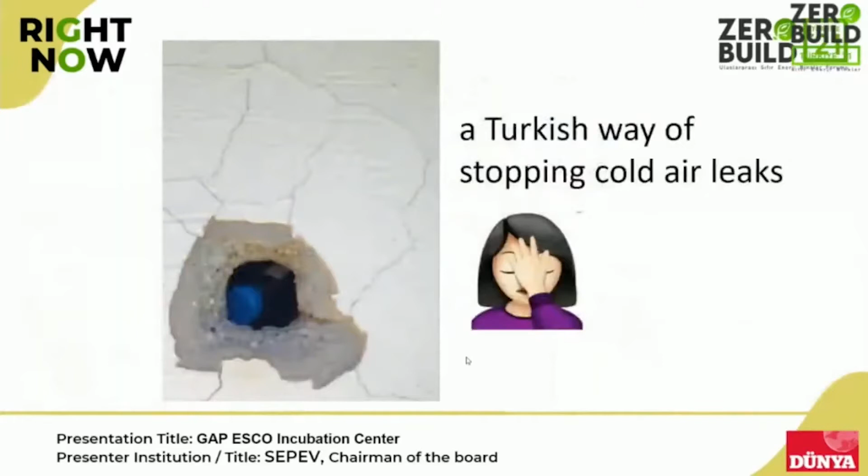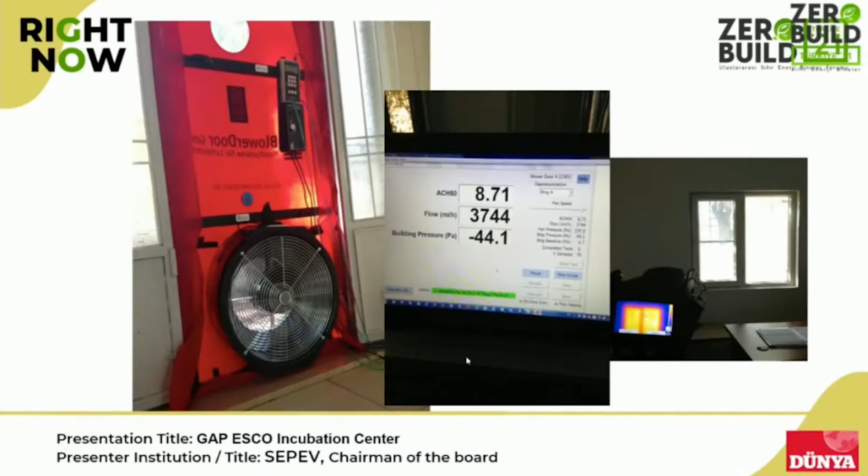We conducted an analysis. It has three main parts, and we worked on the air tightness of all these parts. Following the analysis, we realized that the condition was poor, it was not enough, and we completed a new design in line with the passive house standards.

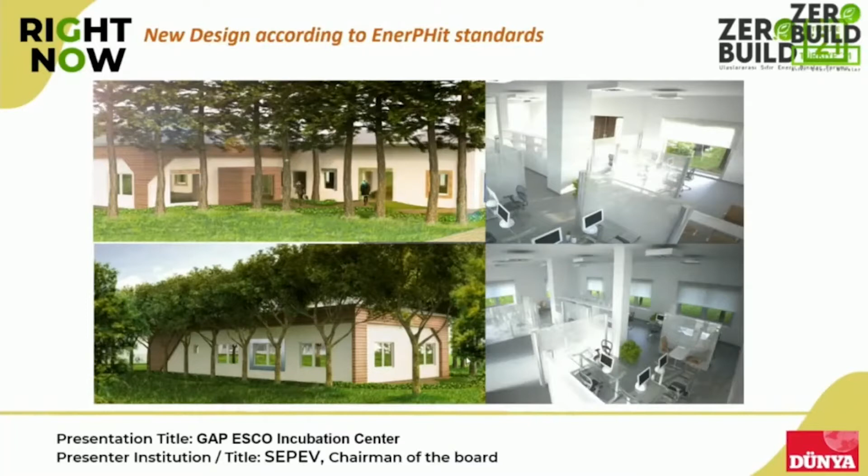We completed the projects and presented them in 3D version. Since it is located in a place with hot weather conditions in summer, first we worked on thermal and acoustic insulation, air tightness, and the best windows and doors. I will show all these stages one by one in the course of my presentation.

We used this window framework and also window frames and door frames for insulation purposes. In order to reduce the workload for cooling, we carried out some controls, also for natural ventilation, and we decided to design windows that can be opened, especially at night times.

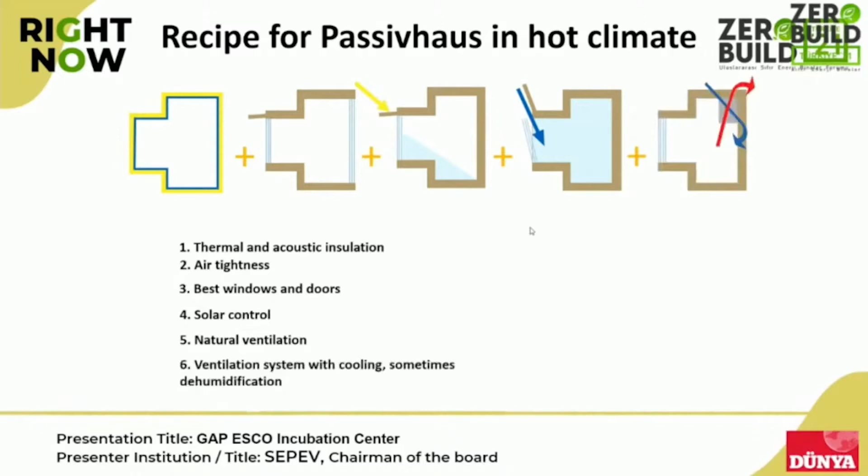We also had heat recovery, and natural ventilation was important for us, along with ventilation with cooling and sometimes dehumidification. You see the plan, it has 300 square meters, and it is an open office design.

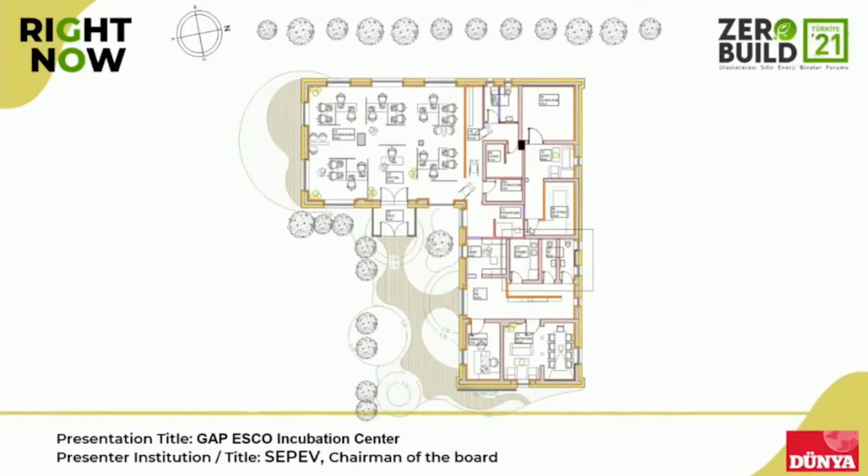So for us, building these types of passive houses is important in the details, and it is really good for us. We can design it in a good way, but we need to raise awareness of all these issues.

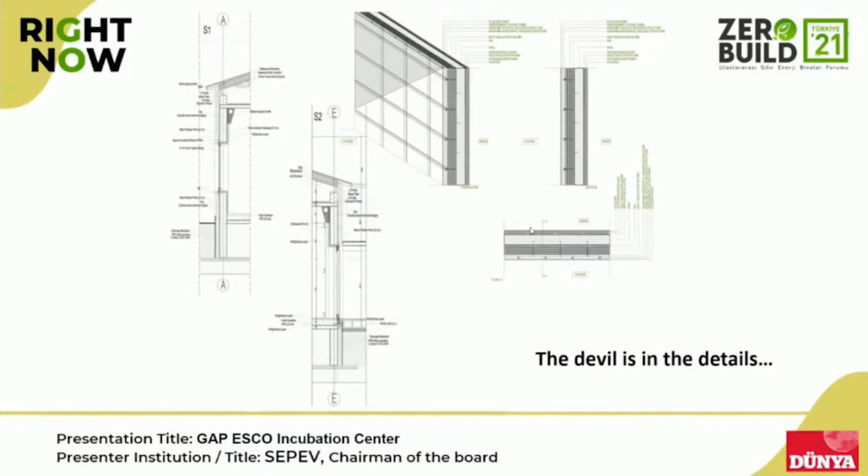If you were not with us in the morning session while I was talking about this issue, we at SEPEV work with designers and artisans, and we also serve as a training center.

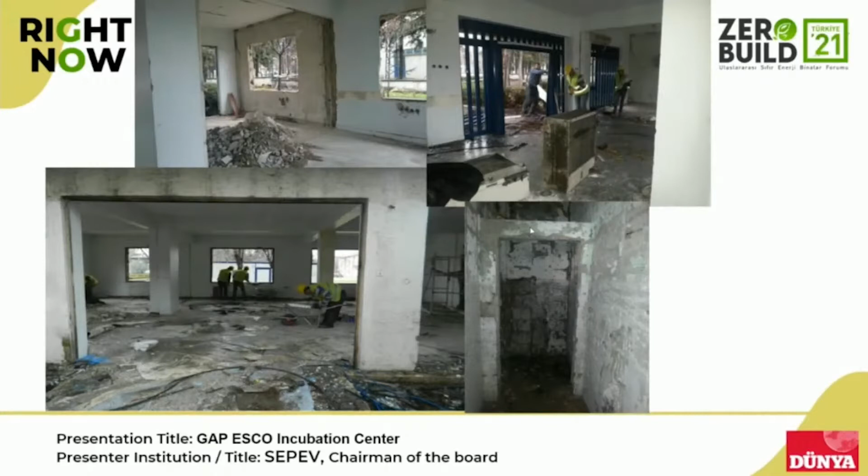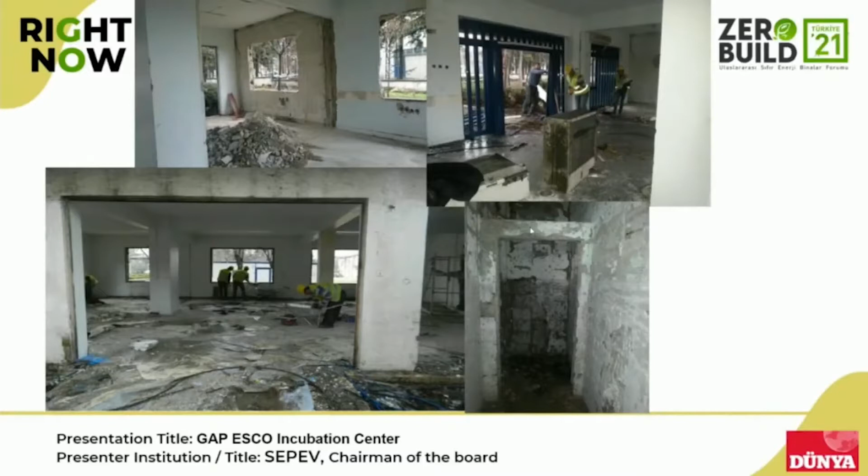First of all, the building was poor in terms of its windows and doors, so we removed them and began working on the interior part because of the moisture. There were some walls that needed to be removed, and we changed the roof completely.

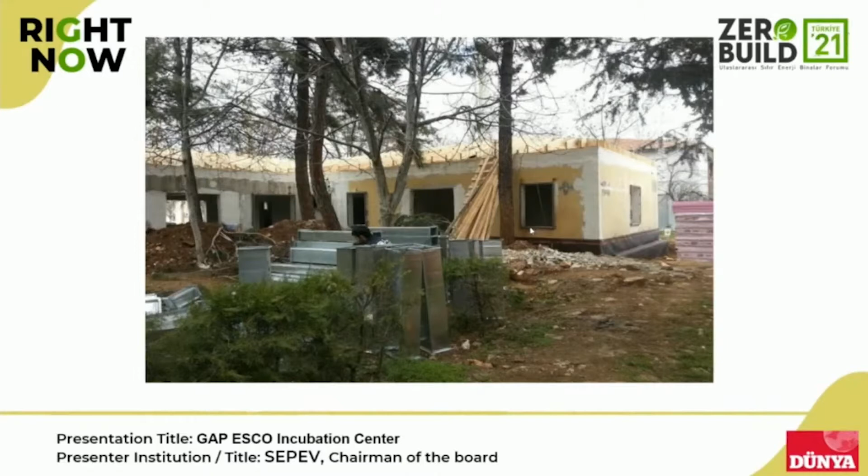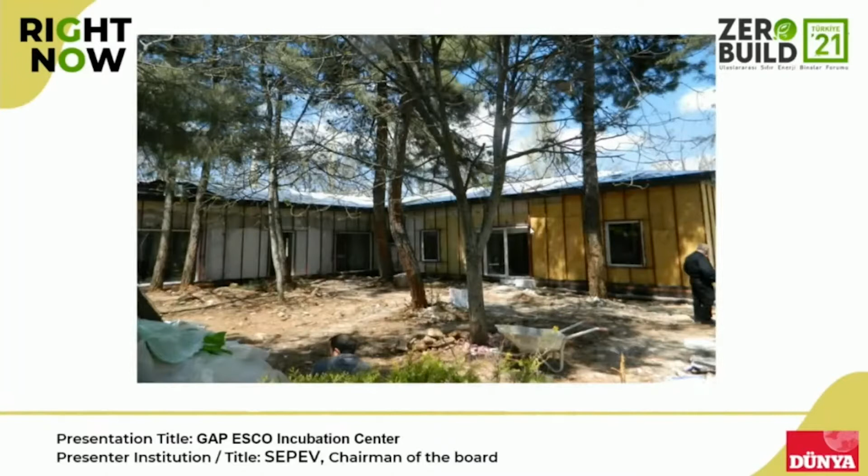It was highly problematic since it was a renovation project. That means we didn't have any chance to work on the basement, but we did our best to enhance the water insulation and drainage system. Although we were not able to reach the basement, we did our best to support the insulation, using material with 15 centimeter thickness.

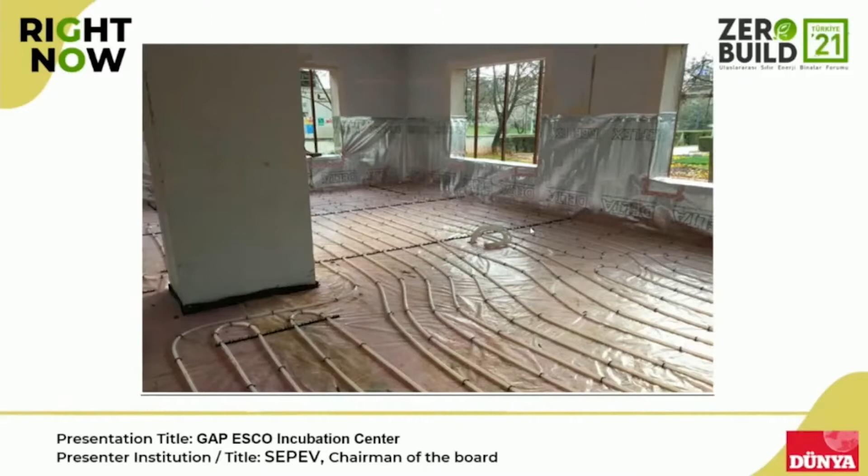You can see the outer wall, exterior wall, and the insulation materials here. The material is important for humidity, serving as a barrier to humidity. It is stone wool and glass wool, which are very important for us.

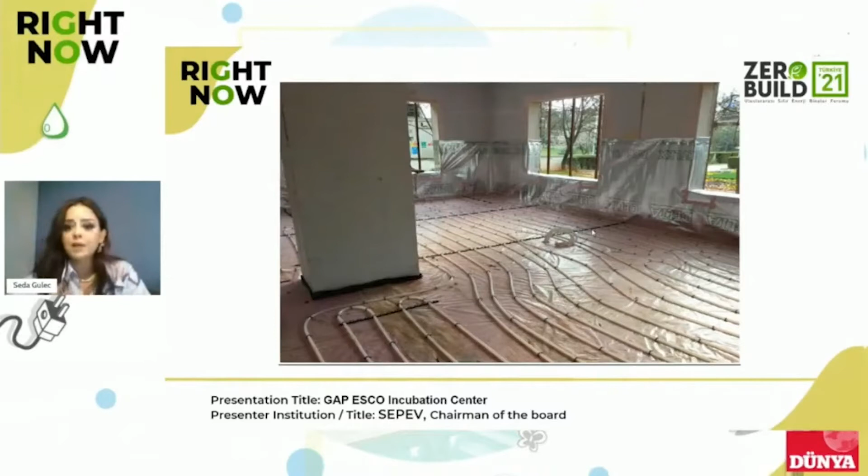It is important for air tightness, and these membranes are important for us. And we have this stone wool.

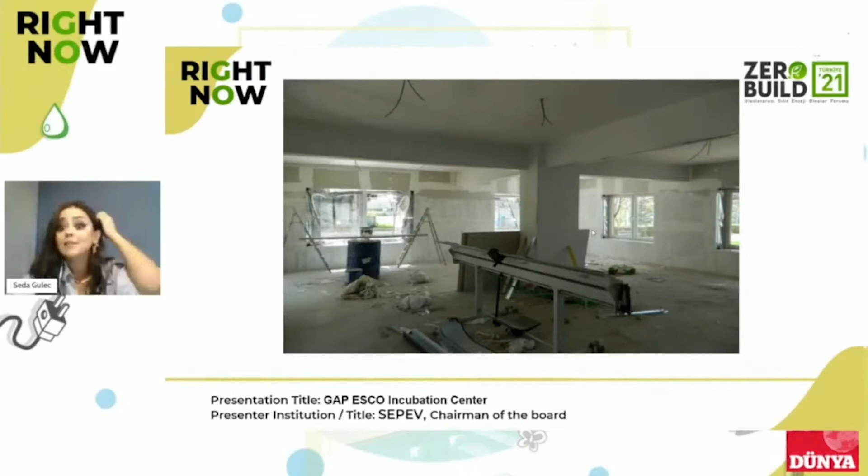Following the interior part, we have these windows which are certified and in line with the standards. As I said before, we have insulation and triple glazed PHI certified PVC windows, and we have used PHI certified MVHR units. We also use an air source heat pump, and we have PV panels on the roof, which is 6 kilowatts, and we also use air tightness membrane and tapes.

Of course, we use insulation materials to make the house a passive house. When we analyze this energy in a general way, the payback period and the savings, what we see is...

Before the renovation and after the renovation, we see that space heating was 143 and it became 19, space cooling was 180 and it became 28, and fans, pumps and electricity use was 65 and it became 53. In total, it was 388 and it became 100.

So the heating savings was about 87%, and in total it is up to 75% reduction in overall energy demand.

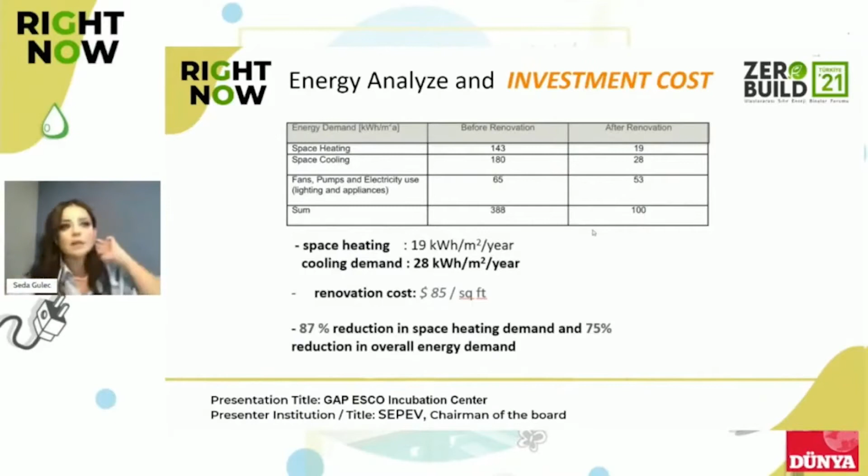And the budget of the project was $130,000, but as a result of extra materials, the budget increased up to 190,000. When I asked the reason, they said it was a harsh winter and they had to wait, and there were some unexpected, unforeseen delays.

Because of the delays, some materials were deformed, so there was an extra, additional cost. When the winter was over, due to the limited time, they completed the construction in 3 months. So they had to replace the deformed materials and finish the building in a very short period. That might be the reason for this increase in the project budget.

The project was completed and the building was opened in 2016. The then Minister of Development was there. The Mayor of Gaziantep Metropolitan Municipality attended the ceremony, and I was there as well. It was a very nice building. We were proud of it, and we are proud of it.

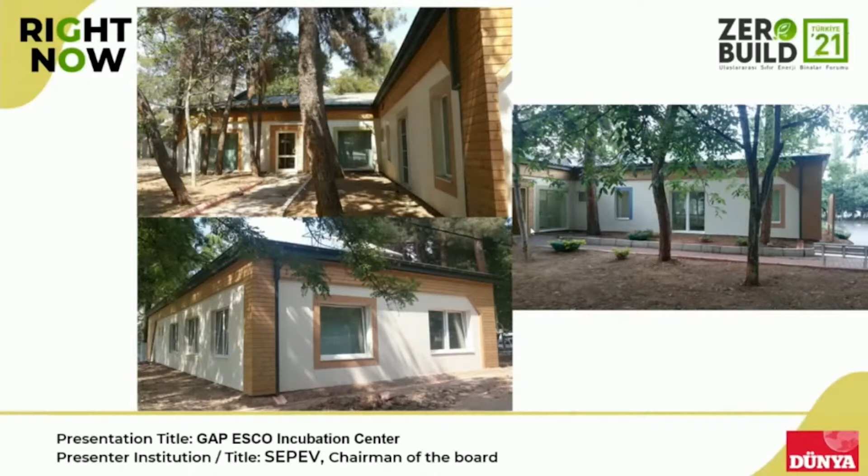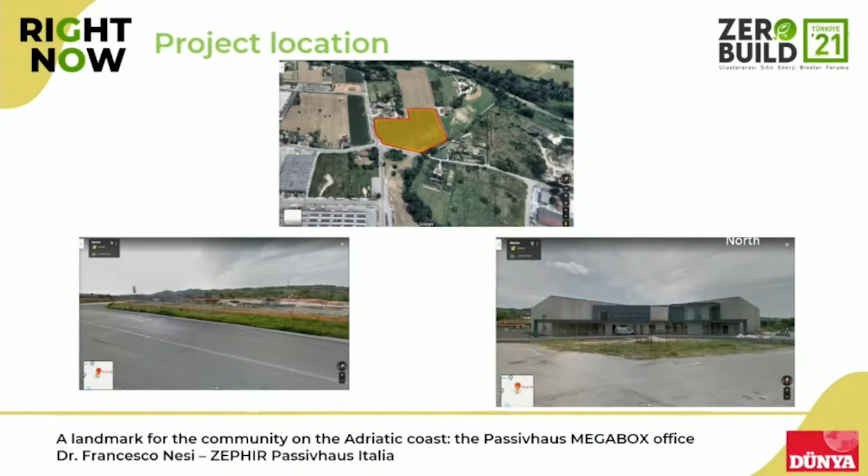As you may see here from above, the office building is indeed a very challenging project since it only faces north, as you can see here on the map. And for sure, it was not an easy task to optimize it in order to finally hit the Passivhaus standard. Only a limited amount of solar gains can be provided to the building. Besides that, several balconies on the northern facade made the task even more challenging, not only shading the already limited diffuse radiation, but also introducing some major thermal bridges to be solved in a smart and cheap way. I speak about cheap because for this project, and in our consultancy in general, economic viability is always the driver of all the choices, provided that there are no comfort or hygienic issues, of course.

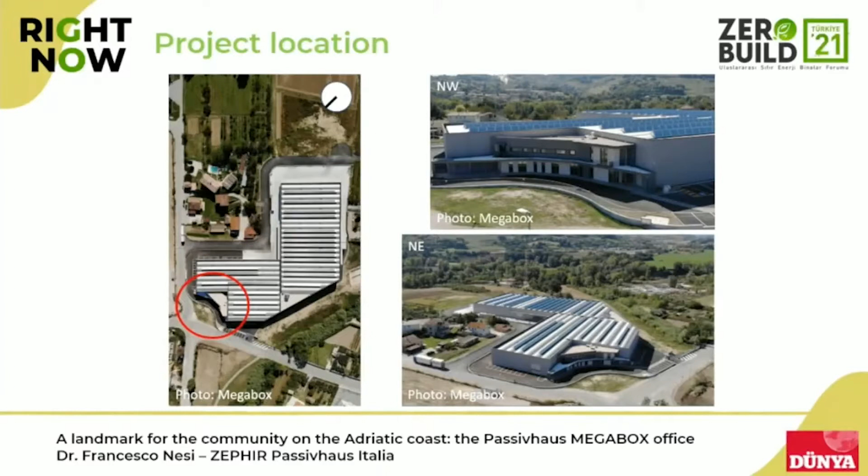Closer look to the final project. The Passivhaus office building is completely shaded on the other cardinal points by the neighboring factory. Here you can see the floor plans, the first and the ground floor. After looking at the project more closely, we could make it even more compact, even though it shows a quite unfavorable form factor. It consists of several office rooms, as you can see here, a couple of meeting rooms in these wings, some storage room, and the lift.

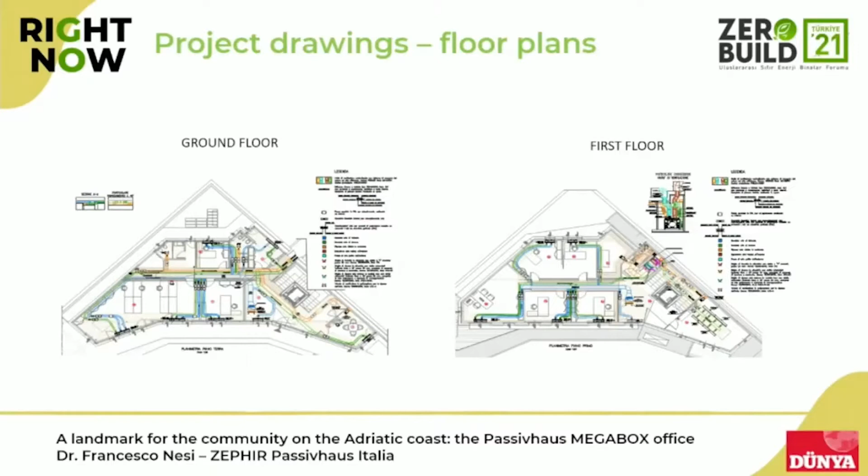As far as the building assemblies are concerned, we can see that the U-values are quite unusual for this warm temperate climate. I would have expected something like 0.25 or 0.2 at least, but they are very low if you really closely look at the climatic situation. The extra costs needed to install thicker thermal insulation nevertheless paid back completely and somehow compensated for the missing solar gains. No solar gains, extra insulation, no way around it. The load-bearing structure is made of CLT, so a wooden structure, and wide use of airtight membranes was made in order to achieve very low values of N50, touching even 0.22.

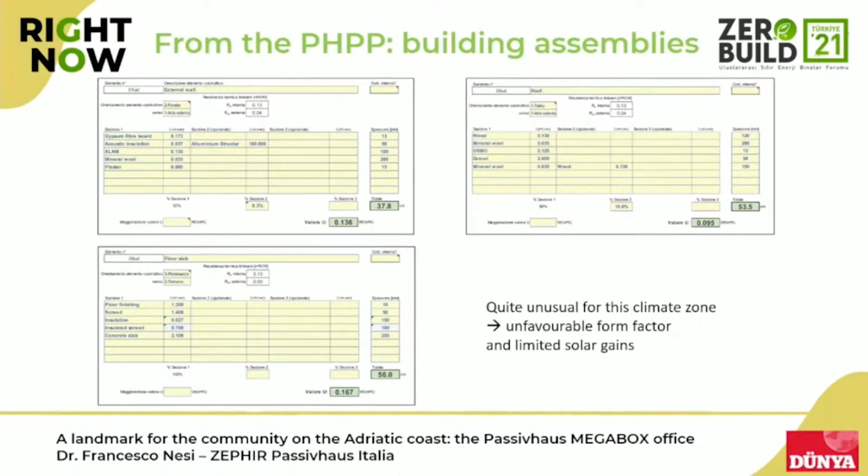Thermal bridge free, almost. This is a similar detail with the window installation. Due to the fact that the load-bearing structure is made of wood, cross-laminated timber (CLT), it was simpler to fit the window behind rather than in the thermal insulation layer. Nevertheless, the thermal bridge still remains quite small, and the installation was very simple also for the tradespersons involved in the construction, who had not so much skill to approach such a Passivhaus project.

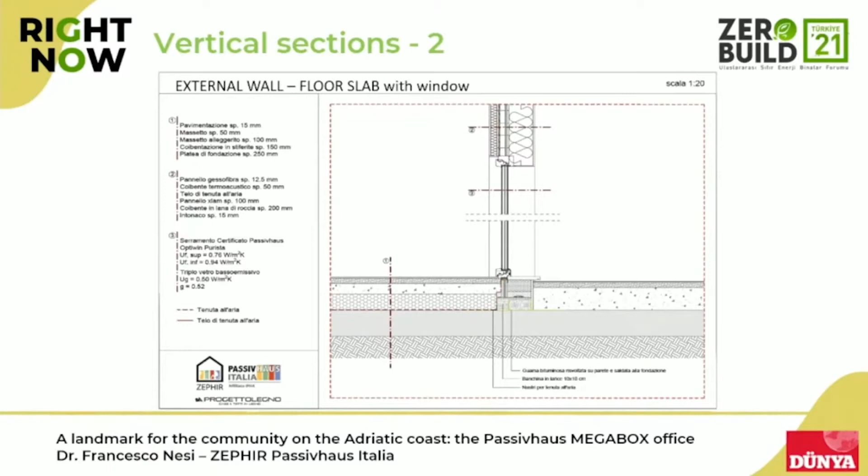All supply and exhaust air ducts are placed within the plasterboard ceiling so that air is supplied and extracted just below the ceiling. This allows a good circulation of air regardless of the position of the interior furnishings.

MEGABOX office building includes 2 meeting rooms, with a completely different pattern of use compared to the other office rooms of the building. To reduce investment costs and keep maintenance costs low, a centralized unit with variable air volume (VAV) was chosen in order to guarantee the suitable airflow rate when needed in each room. The needed airflow is around 450 to 500 cubic meters per hour.

Heating and cooling will be provided by an air-to-air heat pump, so there is only one device with a very simple distribution duct system that simplifies everything, both in terms of technical aspects as well as economic viability.

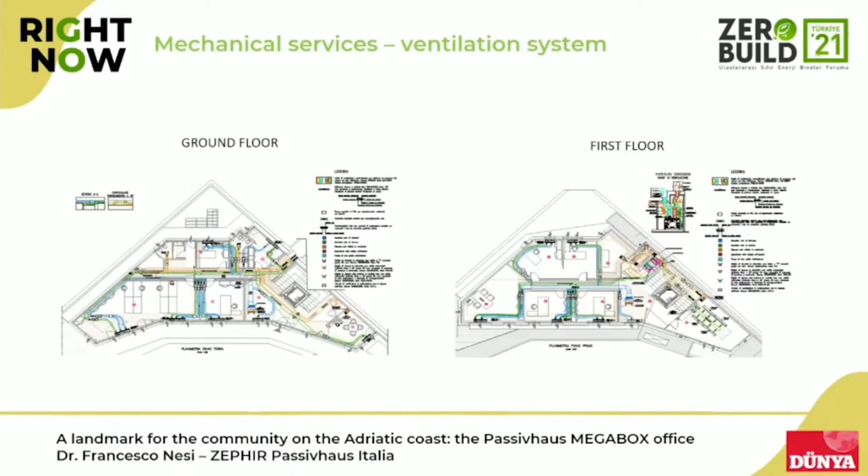Let's come to the construction phase. Here you can see the execution works have been done properly, including the airtight layer and the use of these special airtight collars.

On the right-hand side, very high quality Passivhaus certified windows with a class of efficiency phA, and very well done window installation, made it possible to maximize solar gains whenever possible, as far as possible, because it was facing north, while keeping the thermal losses through them pretty low.

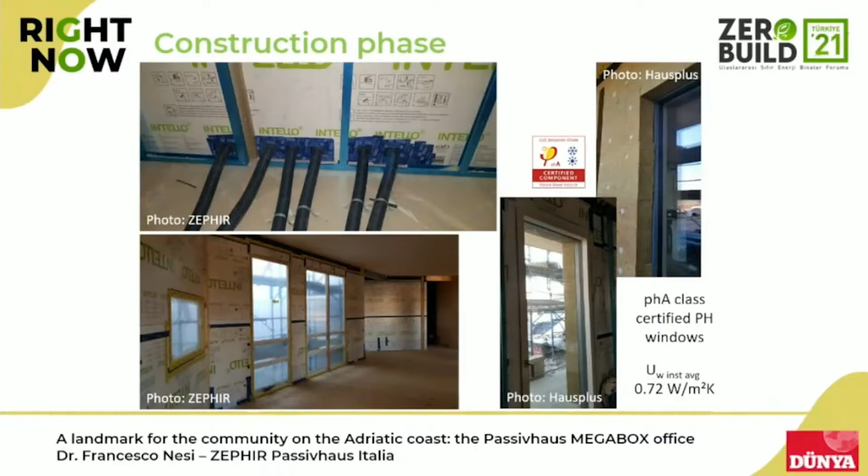Here you can see that the window frame is completely covered by the external thermal insulation layer, which results in a very low installation thermal bridge.

And here you can see also the ventilation unit, as well as the insulation of the domestic hot water pipes and so on, and the distribution below the ceiling of the single valves and ducts and so on.

On the roof, a 200 kilowatt peak photovoltaic system has been installed in order to supply both the office as well as the neighboring factory.

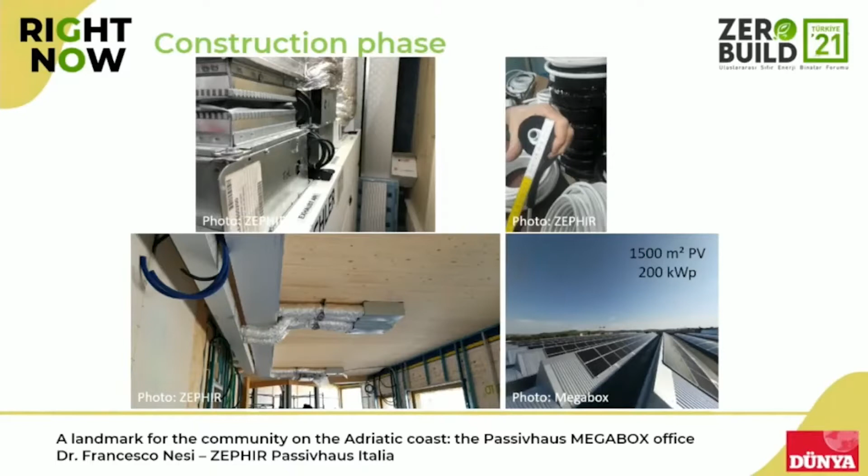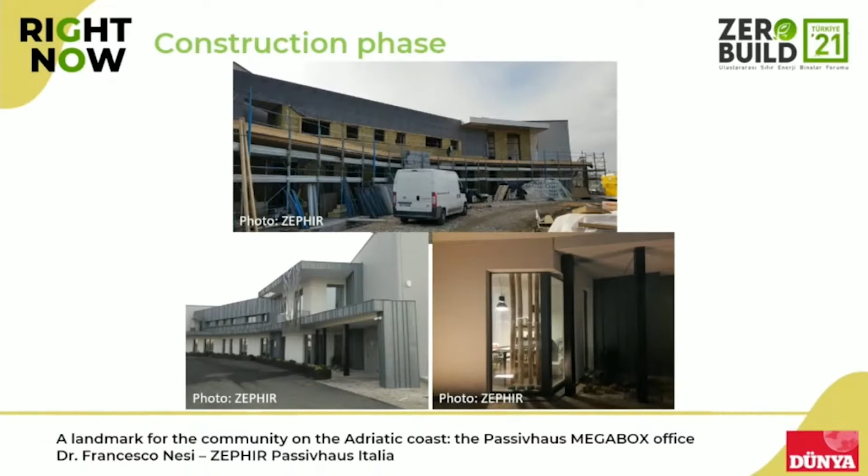Amazingly, it's amazing if you think that we had to face dramatic challenges like facing north, a lot of thermal bridges, and shading by the neighboring factory building, and so on.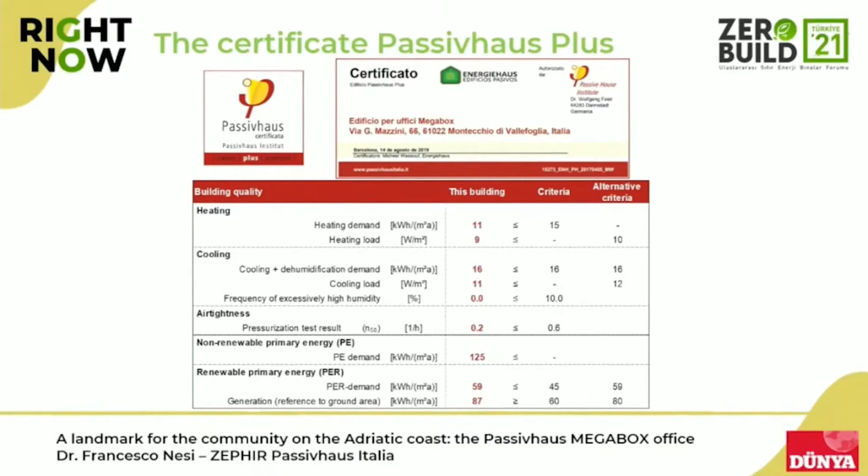The certificate was issued especially during a special ceremony where the mayor, as you can see here, was also present and could appreciate the quality and significance of this building for the region. And this is, in the middle, the MEGABOX owner.

But how did we get to this amazing result? Let's sketch it and analyze it really step by step.

Starting from the initial sketch, and as I said in the beginning, it was not born as a Passivhaus, but it was brought step by step, letting all the stakeholders engage - the owner, the architect, and the mechanical engineer together - in order that, within an integrated design, we could get to this final result.

So in the beginning, starting from this original sketch, the PHPP, the Passivhaus software, showed a not surprising 37 kilowatt hours per square meter year for the heating demand. After working a little bit with the windows, by reducing their number and their size, we could get further down.

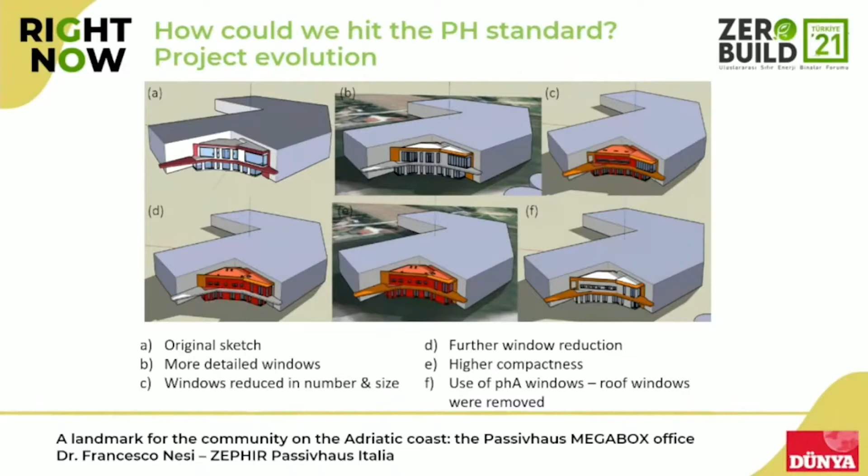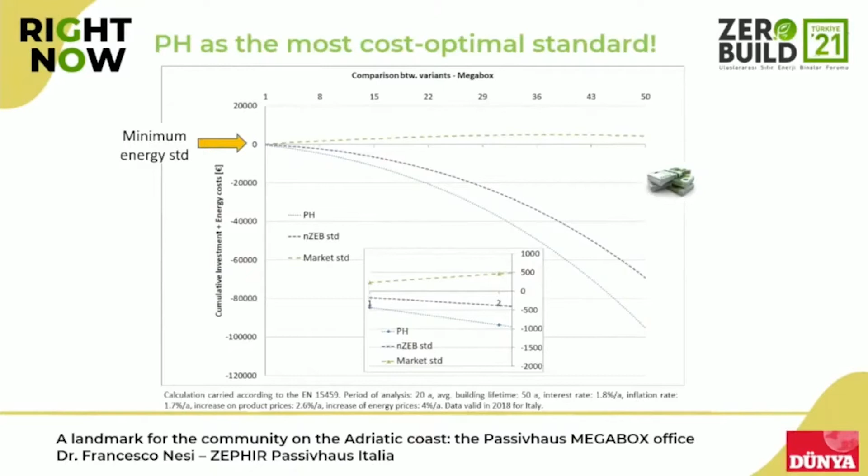I'm approaching the end of my presentation. I just leave you these words given to us by the factory owner, Ivano Angeli, and we can read it together. He says: pleasant and comfortable for those who work there, because while working, everybody must live in a healthy environment. We want to be an example for other companies and for the whole community in that region.

So we even interviewed the house owner, and I would suggest to the organizers to share the video, which is on our YouTube channel, and which also includes some subtitles in English, of course. Thank you for sharing it.

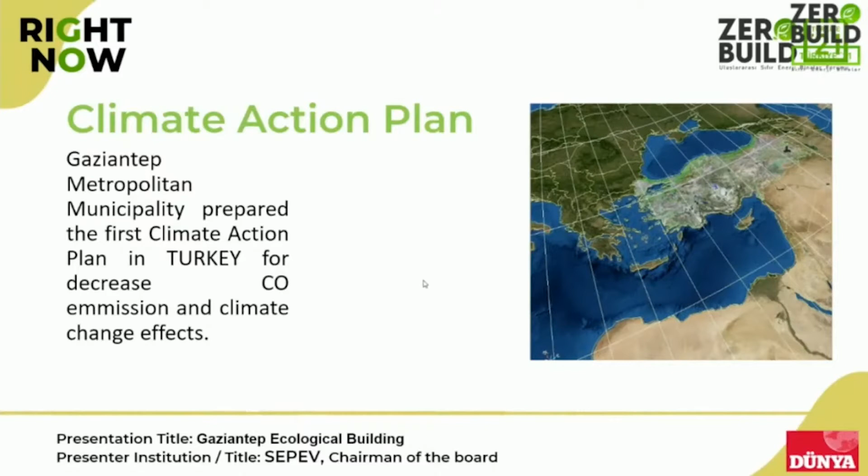When we look at Turkey, 32% is within the buildings sector. So we have a huge migration. There are some buildings which are not sensitive to climate, so rather than making up for it, we do not take into account the energy efficiency.

As metropolitan municipality, in order to prevent the effects of climate change, we planned an ecological Gaziantep plan with 32 million square meters. I like this picture a lot and I share it all the time, because it explains very well why we opened this place for a master plan. You can see there are different buildings, and it's affected by the collective housing pressure.

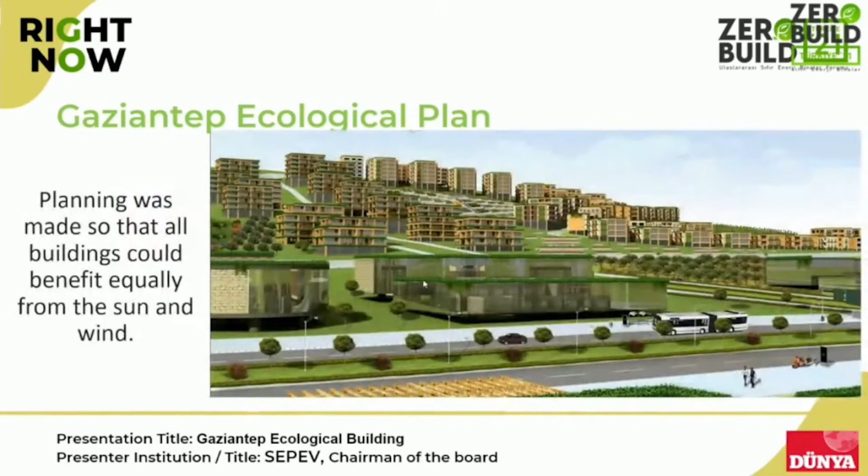So please do not forget this - we have all the green areas, all the recreation areas preserved, and also, as I show you in the visual, there is a valley effect, so no one blocks the other's sun or wind, and there is a very good structuring. Of course, planning was made so that all buildings could benefit equally from the sun and the wind. As you can see - just a second.

In this area, as you can see, this is the construction that we hope for. Maybe the envelopes or facades may not be similar to that. However, where there is the valley, there will be low intensity, and when you go higher, there will be higher intensity. When I say high intensity, maximum 8-story buildings will be constructed. Except for this, the green areas will be used as gardens and preserved this way.

There will be 150 square meters. The house can be constructed there.

We can continue. So when we look at the Gaziantep ecological city, back in 2011, no one understood what ecology is. Everyone thought that this is a spaceship. So we wanted to have an exemplary building for that.

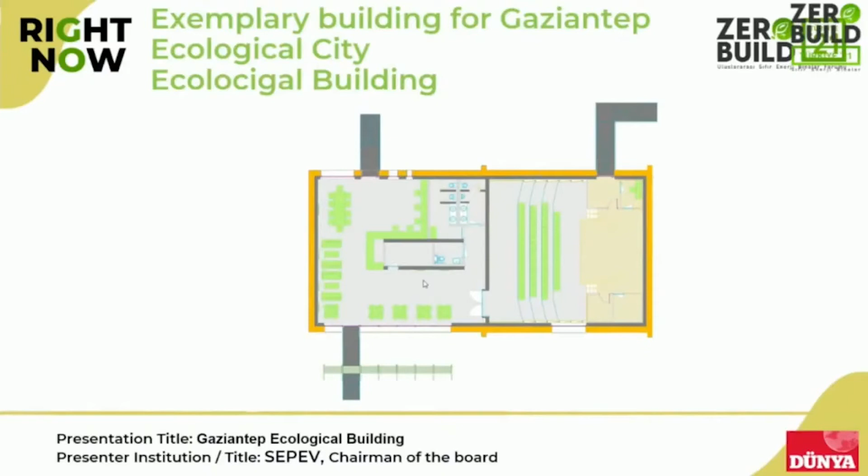So we wanted to have a Passivhaus. There is a 75% energy saving that we have made, and energy efficiency could be increased up to 90%. So there needs to be better insulation. Tightness measures will be taken, and the equipment should also be energy saving equipment. We will pay attention to all of these. And we wanted to support our building with photovoltaics, to make it a nearly zero energy building, or let's have a zero energy building.

However, as we observed, it's a plus energy building, not a zero energy building. So we can say that it produces more energy than it consumes. 30,000 kilowatts of energy is produced, and 22,000 kilowatts is consumed. So we can say there is a surplus of energy generation.

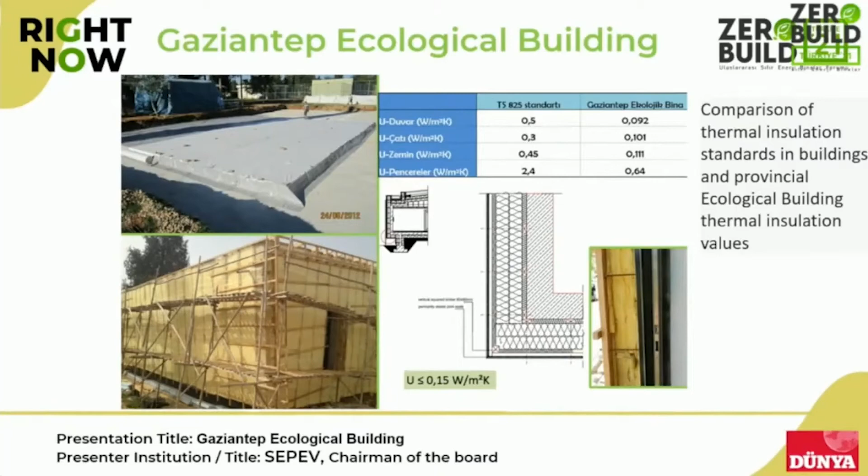We can say that there is 35 centimeters of insulation in the roof, and in the foundation there is 30 centimeters. We used blown glass insulation and XPS, and as you can see in the upcoming pictures, our roof is a green roof system.

Our windows carry the Passivhaus certificate. Of course we will talk about the challenges we faced—this is an example of that. It's very good news, very fresh news, that a Turkish window company now has a certified Passivhaus window, and this is very important for people.

It's quite important because while building this, we waited six weeks for windows to be imported from other countries. These are very qualified systems—triple glazed systems. However, there was a due date issue, because when you give these measures, you have to meet certain requirements for air tightness.

In the TR54 presentation, the window company will share very detailed information with you. The advantage of this is that we can find our product on the national scale at a better price, and the deadline is shorter. I believe this will not be only for the window system—most of our construction materials will have the Passivhaus certificate, so that zero energy buildings can be more accessible for everyone.

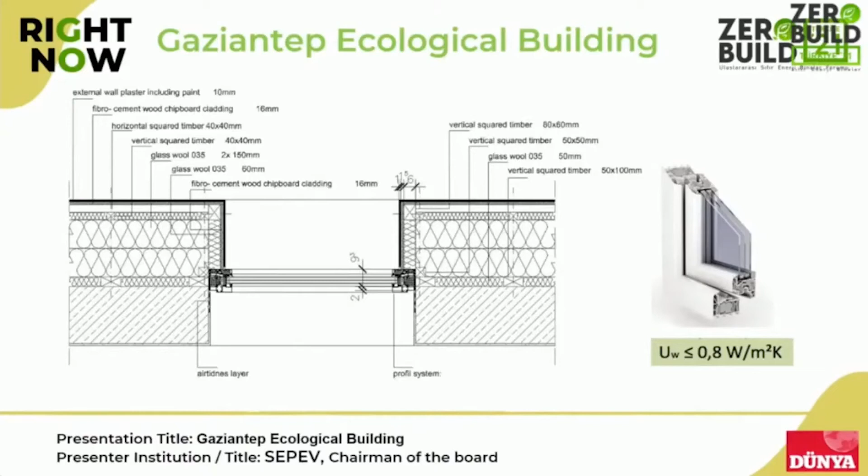I can continue—we have the systems, and of course there could be different sessions, but I always give the same example. This was a very important and exciting sunny day for us.

The equipment—now there's the blower door test equipment. Of course in our systems, the blower door test wasn't there. We invited a team, and the equipment was lost in the luggage at the airport. We delayed a few days, the equipment was found, and they came to work and said, 'you are making a Passivhaus, Turkish style.'

They said this to us, and of course we believed we did everything according to the project. A test was made in Turkey, and you know, you wouldn't pass the first test—these structures go through field tests, and you have to take other measures to pass.

Of course we were very nervous. They put the building to the test—we closed all the doors, and they applied 50 Pascal pressure and measured 0.51. We passed the tightness test, and we said yes, it's a Turkish style Passivhaus. We were rightly very proud to have this.

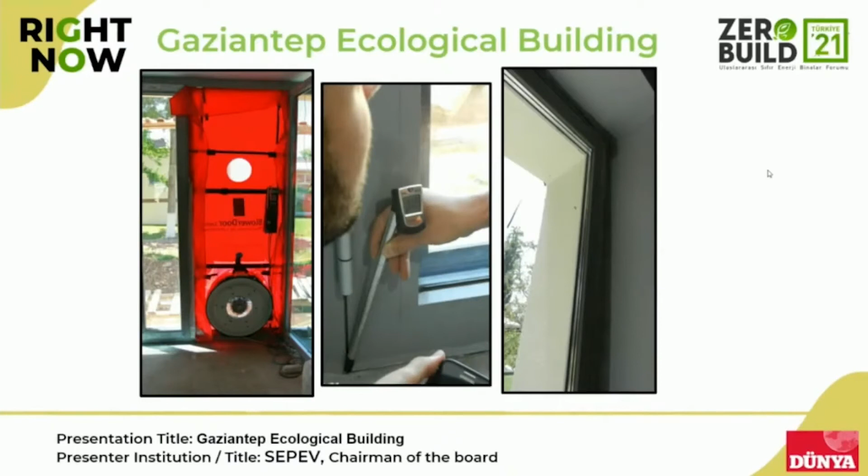For people who don't know about Passivhaus, I want to show this—the ecological tightness bands are implemented differently at the junction of the window and the wall, at the corner of the wall, and we're thankful we passed the test without any problem.

So we went to the UK, and we did it together with Passivhaus experts. I couldn't find this solution there, and after that he gave me his email address, and I drew some of the sketches myself. As you can see, there was a shading element. This was integrated.

So regarding that, the detailed solutions were given, and my biggest fear was that there would be a leakage on the roof. Since 2014 we've been operational. It has been 7 years, and in 7 years there hasn't been any leakage from our roof. I was afraid there could be damage to the insulation, but there wasn't any problem regarding that.

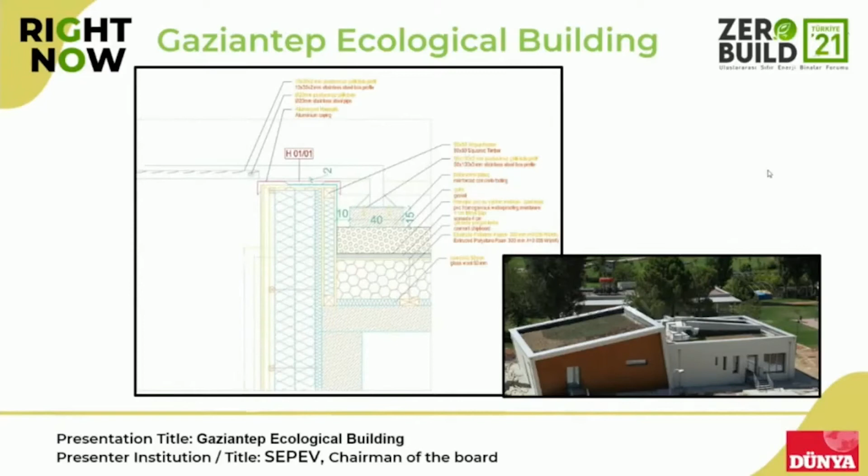So it is not only energy saving which is important, but also using water efficiently, which is very important for us. So on our roof and also in the landscaping of the building, we chose endemic plants which consume less water than other types of plants. So we have green, which also produces oxygen, but we also have these plants which consume less water.

This is the front facade of the building. As you see, it benefits from daylight at a maximum level, and we reduce the heat workload even in winter time. It is one of the key lessons of ecological architecture, and it is also about the issue of shadowing.

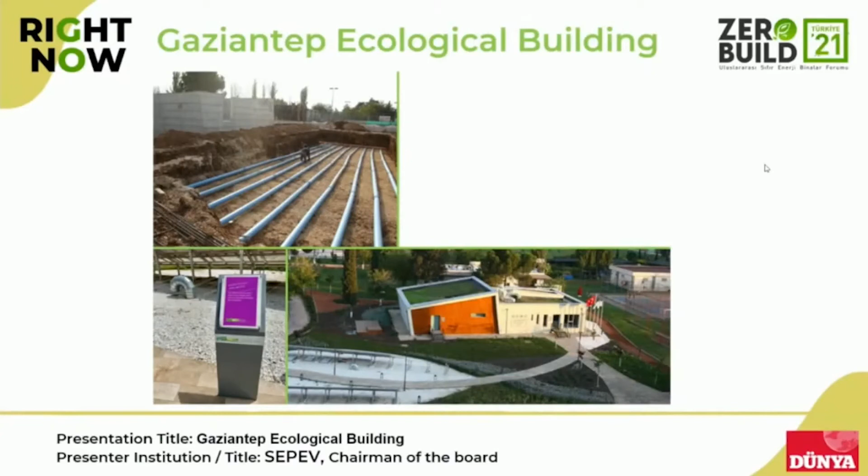So in winter it is 0 degrees Celsius, and then we use it for heating purposes. So we keep it at 24 within the building, but we do not heat from 0 to 24, but from 15 to 24. So we use this system, which is called the Canadian Canal, and we save energy here.

In this interior lighting system, we use LED energy, which consumes less energy, and we get optimum benefit from daylight. And we also have this LED lighting system.

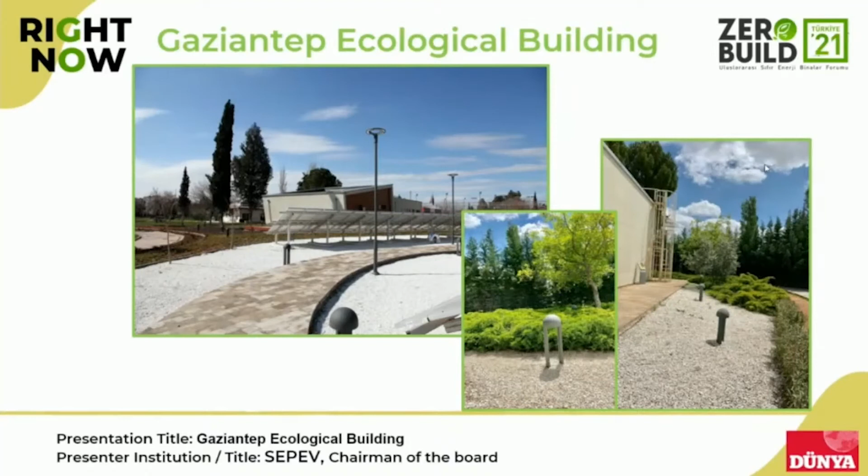And I'm about to finish. I just wanted to show that this landscaping does not create any pollution in terms of lighting. And we use this type of system.

We try to use local materials, for example this basalt stone, which you can easily find in Gaziantep, and we use some materials for decorative parts. Even these decorative materials from Gaziantep—we use this copper slab.

In this building, so far, we hosted about 200,000 people. It hosted several events; for example, the EU Climate Action Week was held there, and the EU minister was there, and we also worked on energy efficiency. I will show you some children in my next slide.